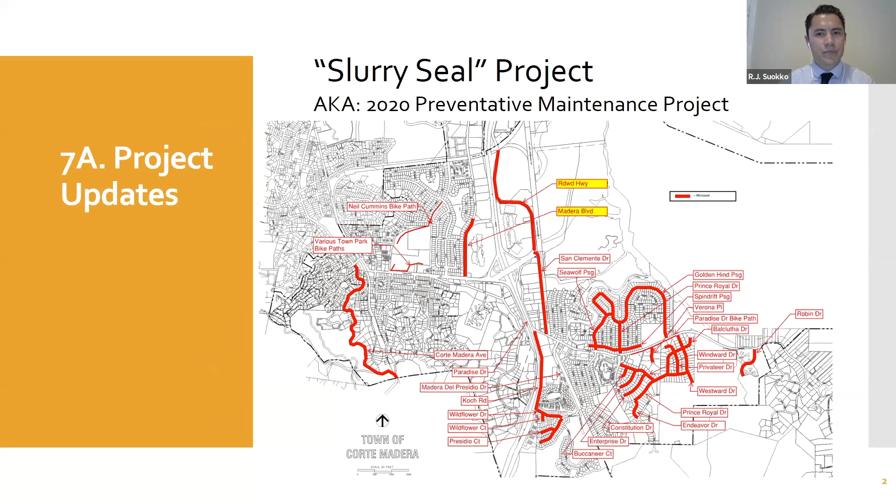All right. I'll jump into Madera Boulevard, which is what David Parisi will be assisting with here. So this was brought up at the last BPAC meeting as potential for improvements with regards to striping if we can loop it into our current Slurry Seal endeavor or micro project that's going off. And we think this is a great opportunity to include this street as a micro seal street in our micro Slurry Seal project that's about to hit and go.

And Parisi has been instrumental on a quick time frame to assist with identifying some real good enhancements for this little section here between what you're looking at in the upper left, the Madera Council Crest intersection, all the way to Tamalpais for that section along Madera. So I'll just touch on it real high level. We're looking at a class 2, buffered class 2.

Are people able to see, or do we want Jared to try to zoom in a little bit? How's the size of the screen and text? That's better. Okay, great. Thank you. Yeah, thank you, RJ. Better. Yeah, thank you.

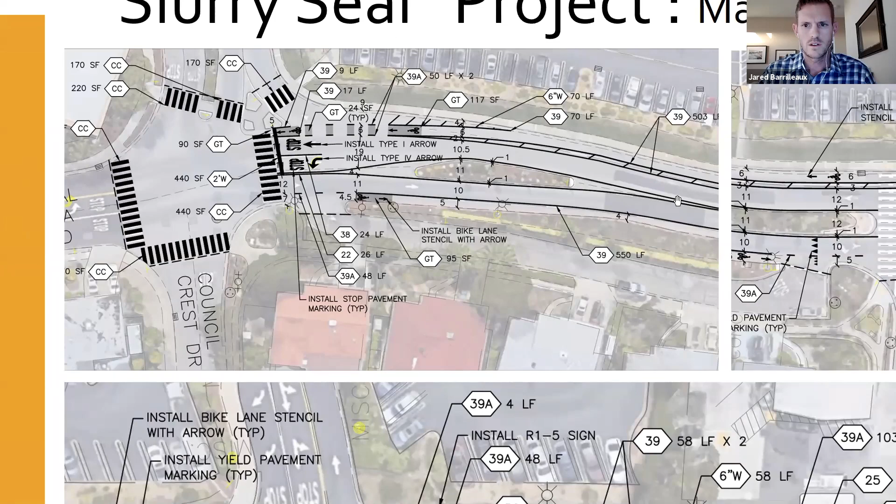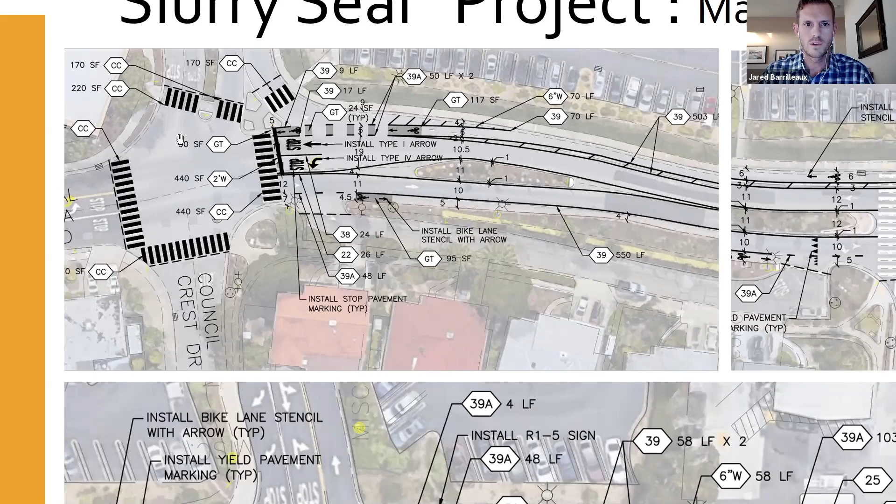You can see here in this zoomed in version, the buffered class 2 bike lane as it's approaching the Council Crest intersection, and then transitioning into Tamalpais, which you may recall was just recently done with class 2s. We see a lot of opportunity for improvement at this intersection, and then moving down and through all the way down to Tamalpais, there's been quite a bit of improvement for the cycling facilities that we're pretty excited about.

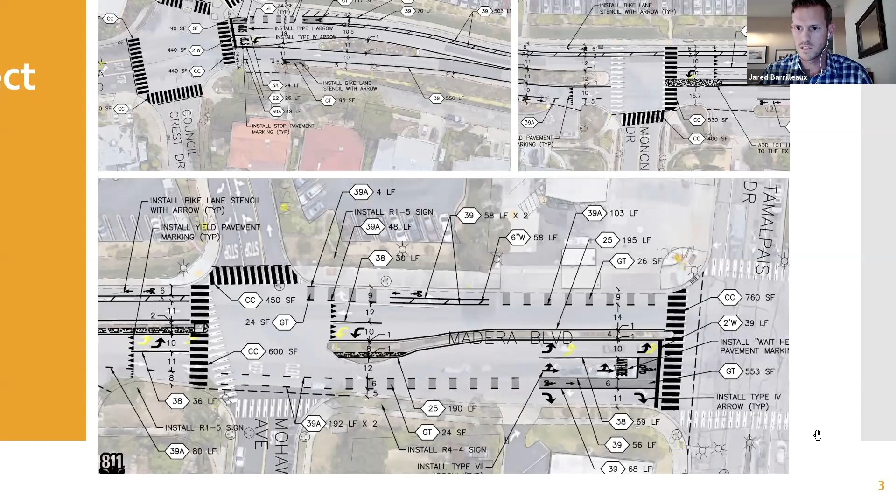That's why it has all these call outs, details and measurements for a contractor. Essentially what we did is we took some measurements of the street, and when the town asked me to look at this, I realized there's quite a bit of opportunities which I wasn't even aware of, but it was the town's idea to do a buffer bike lane. And lo and behold, in the northbound direction, that is totally possible. We are showing, for the most part, a 6-foot bike lane.

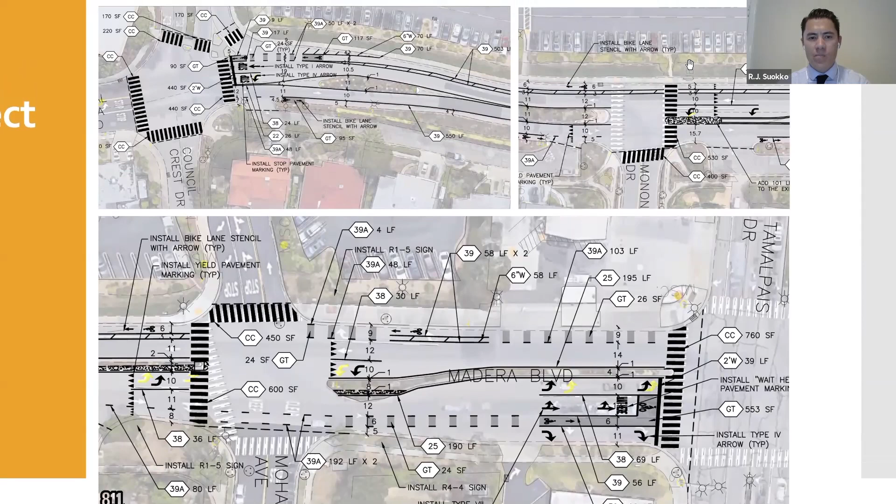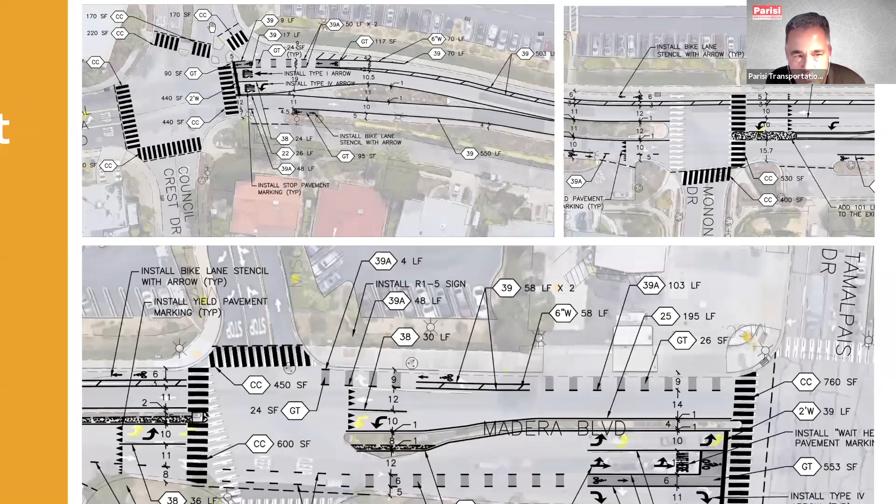It narrows down to 5 feet in one spot near the new pedestrian buffers or refuge islands, with a 3-foot buffer the entire way. So all the way from Tamalpais to Madera Council Crest, it'll be a continuous bikeway with some green blocks at some conflict areas by the 76 station and the right turn going into town center. Moving all the way north, at the intersection of Madera Boulevard and Council Crest, we found an opportunity to slow down that right turn a bit to the highway without affecting congestion. The intent is to not make it such a sweeping free right turn, but to provide some awareness between the cyclists and the motorists.

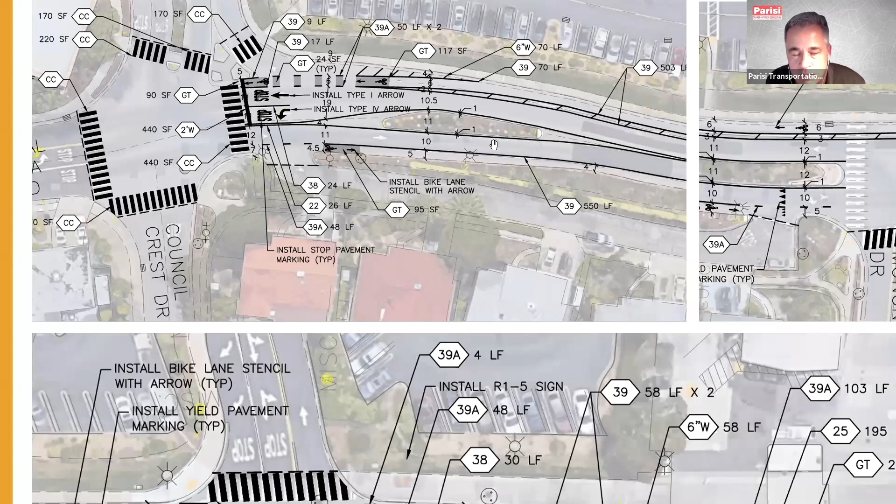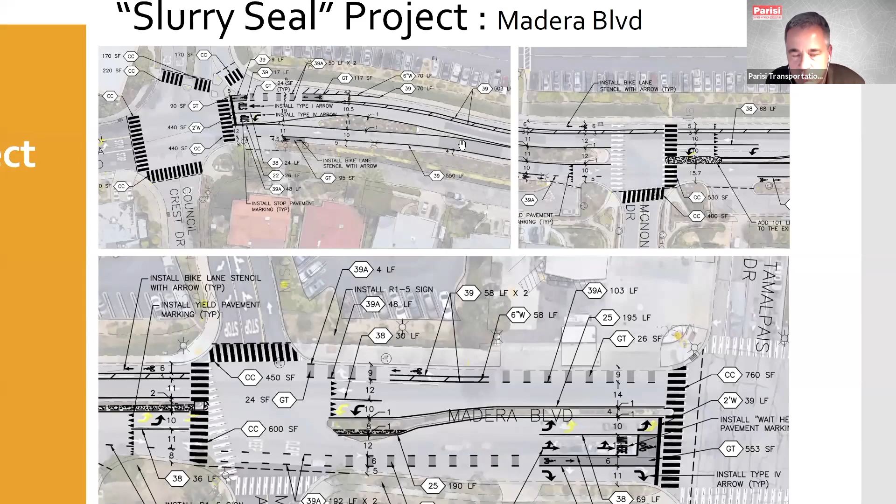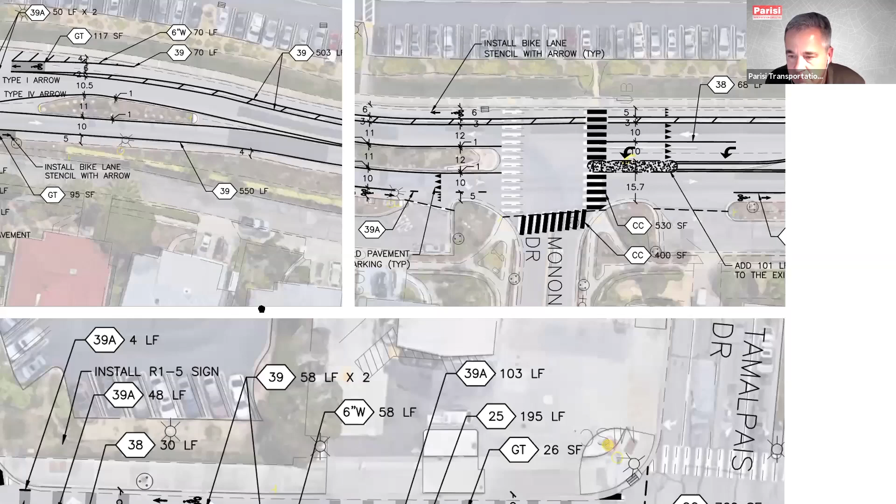Also, the traffic lanes are going to be reduced anywhere down to almost 10 feet in some areas along this street. In the southbound direction, we don't have as much right of way, and there's some tight points at a couple places. We do have enough room to get a 10-foot traffic lane in with a 5-foot bike lane, and there's also a 1-foot offset from the median island. I'm not concerned about that at all, because that's what we're seeing now on Tamalpais Drive - 5-foot bike lanes and a 10-foot traffic lane, and it seems to be working pretty well.

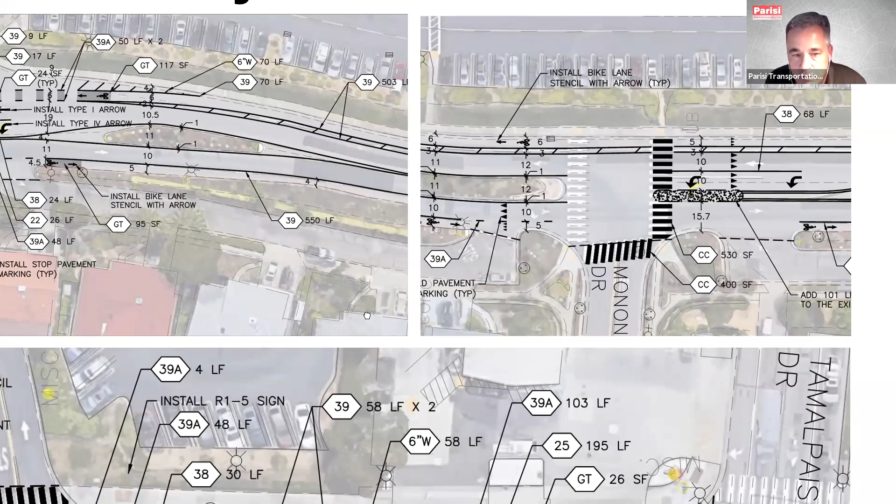And that could be continuous also all the way from Madera Boulevard down to Tamalpais Drive. On the bottom of this sheet, as Jared was pointing out, we also determined there's enough room to get what's called a bike box in at the intersection. Jared can put his hand on that real quick. There, we have 40 feet here, which is plenty of room to retain the traffic lanes that are out there today.

But also slide in a bike lane and then a bike box right at the end of the lane where cyclists, when it's a red light, can queue up so they can take a left turn without getting sideswiped or broadsided by a vehicle going straight, or they can go straight across. This is a neat opportunity to improve bike safety at this location without affecting traffic operations.

And there'll be some green blocks leading into what we call a streaming bike lane that goes into the bike box. Probably the most recent one of these we've seen implemented was on Camino Alto at East Blithedale. That's only 36 feet wide between curbs. Things are pretty tight there, but it works. We have 4 extra feet here between the curbs, so it's more than generous to provide this type of facility.

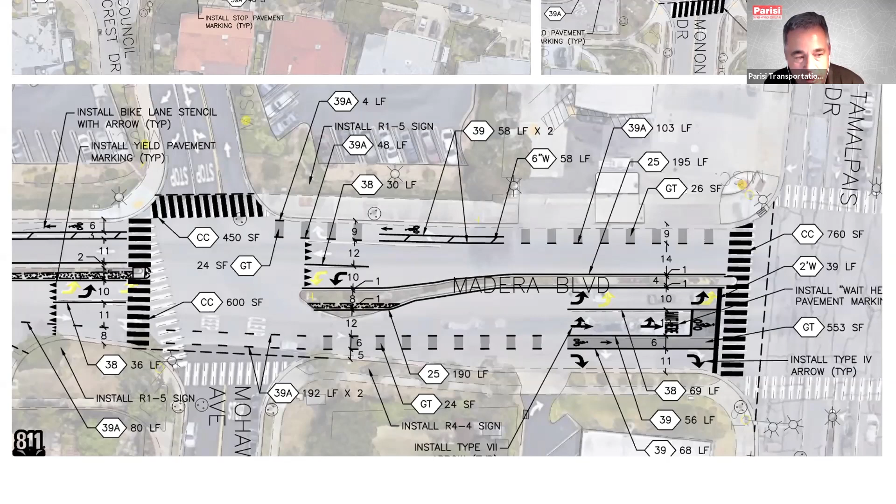So I'll stop there. There's other features on the street: continental crosswalks, stop bars, yield lines. We're right now looking at upgrading some of the signage as well. But at the end of the day, compared to just a few months ago, we could have continuous bikeways all the way from Tamalpais down to Pfeiffer, in both directions.

David, can you touch on just the right turn pocket that we thought would be better to have the dash green instead of that right turn pocket, based on, I assume, volumes? Right here? Oh, yeah. Yes, yeah, absolutely. Yeah, it's interesting.

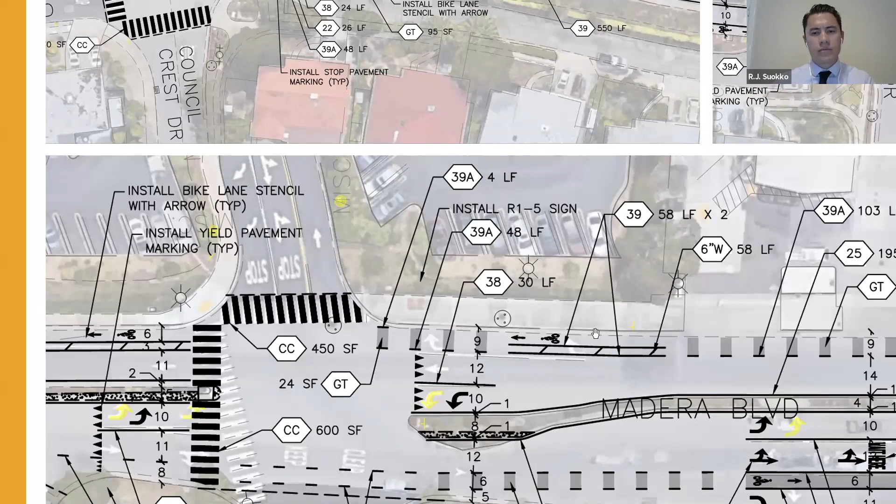We all get used to things, but this is actually a minor driveway for right turns into the shopping center compared to the next one down. It's interesting, this driveway has fewer right turns than the one to the north, but it has its own right turn lane. The one to the north has much heavier right turns.

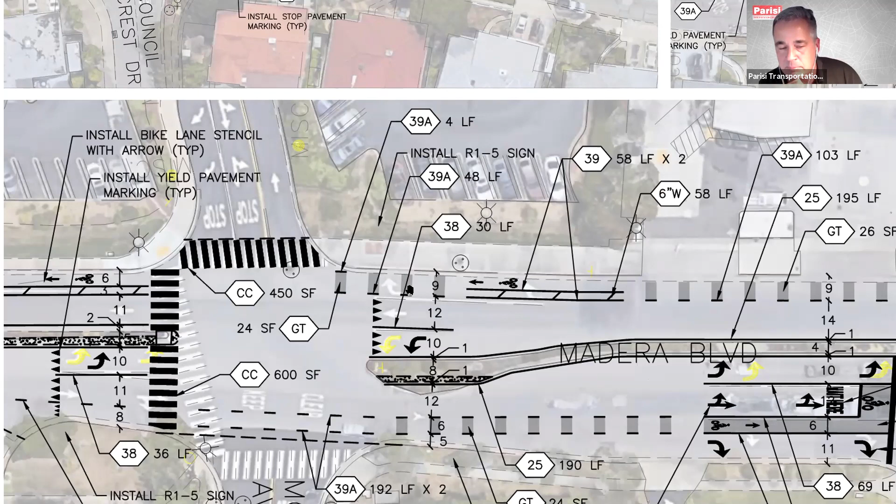It actually has two lanes going in but doesn't have a right turn lane. So just looking at traffic operations and how queues dissipate, we felt the best design would be to eliminate the exclusive right turn lane and provide green blocks. Right turns will go through the green blocks and make the turn into the shopping center. It's a safety function. We don't see any effects on traffic operations compared to current conditions. I think it'll be a safer condition because we don't want to eliminate that bike lane for a right turn lane also.

Is there more? Is that the end of the report? So that includes our presentation for Madera Boulevard.

Let's open up to questions first from BPAC.

David, can you explain the specifics? I think you mentioned trying to slow down the right turn from Madera northbound to eastbound. Can you explain the specifics of what is planned there?

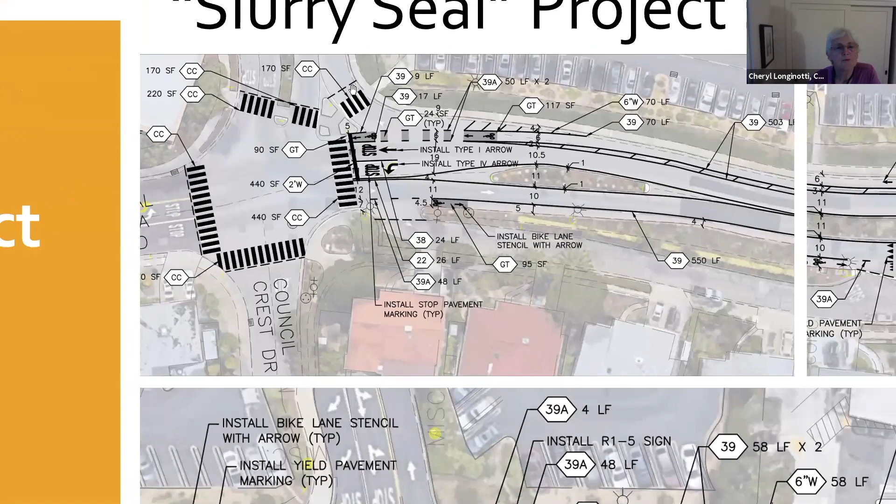Yeah, you can see, Cheryl, it's a pretty sweeping right turn, and you go into your own traffic lane. There are two eastbound lanes on Madera, on that 500-foot long segment. There's been a collision there in the past with a pedestrian. What our intent is, especially for promoting cycling through here, is to provide more awareness of slowing down that right turn, so there's a lot better sight distance between the motorist and the cyclist, they're not going super fast, and they're paying more attention.

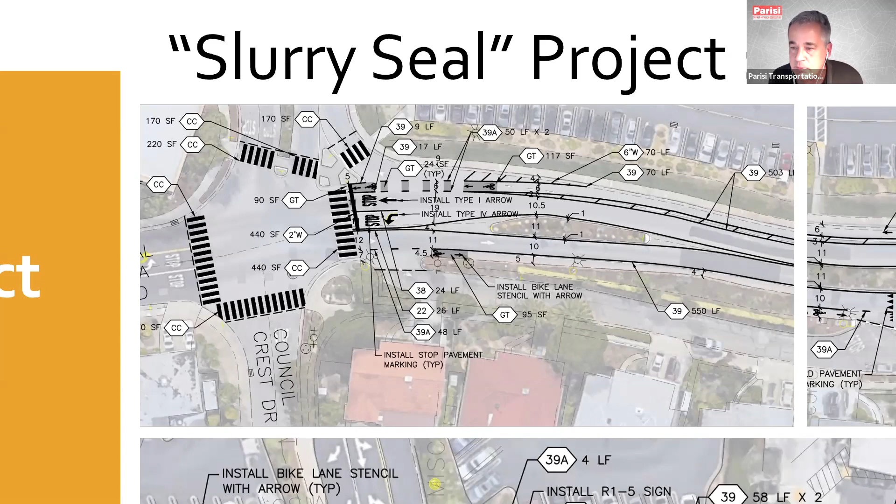By the way, at this location and southbound approaching Tamalpais, we're going to install some signs that say right turn yield to bikes, which will also have the green line on it, so drivers know it's a regulatory sign, something they need to do. By the way, that right turn is the only movement at this whole four-legged intersection that is not stop sign controlled.

Any more questions from BPAC members? And someone educate me as to whether or not micro seal, chip seal, and slurry seal are different, or are they all the same thing?

I think that's my area here. They're all different, and moving forward we're probably just going to keep it simple and call it slurry seal. A micro surface is a slightly more modified version of slurry seal. It has more additives, and therefore it's a little more viscous, a little bit thicker, but it's very similar. So it's kind of the deluxe version of a slurry seal.

A chip seal is different. If I could explain it in a simple way, it'd be like taking a slurry seal and putting Tic Tac size rocks on top of it after. That's more common in more rural areas, you'd see it a lot in West Marin and whatnot.

And then, sorry, what was the third treatment you were asking about? Was it just those? You hit all three, micro, chip. Okay, great. Not to complicate it further, sometimes they will take a chip seal and do a slurry on top of that so you don't have that abrasive surface, and they call that a cape seal.

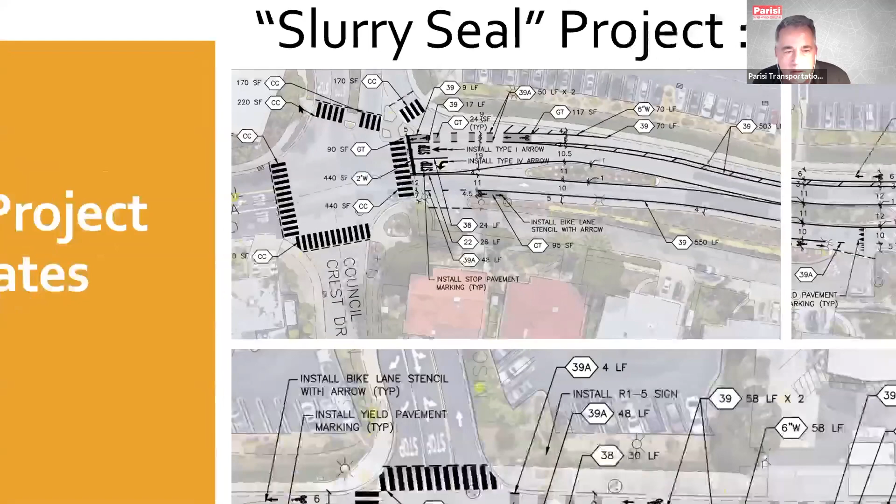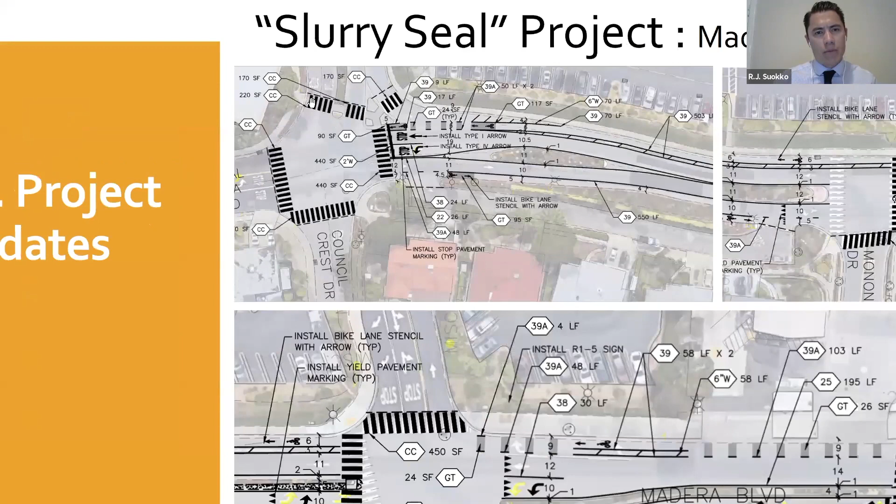You can see those dashes—that's where the street will be repaved, marking the limits. It's really dictated by the location of that curb ramp. You can't put a stop bar on the wrong side of a curb ramp landing; otherwise you're creating a conflict zone.

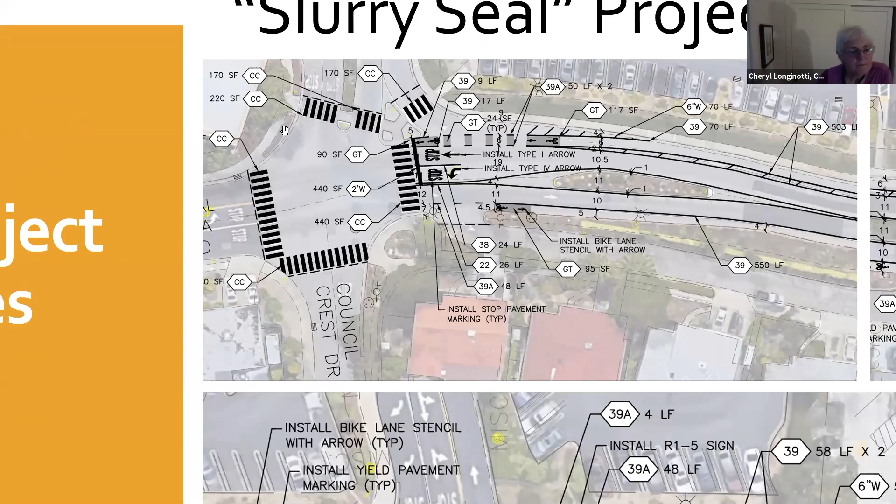Any further questions from BPAC members? Okay, then we'll open it up to the public. Is there any member of the public who wishes to comment on this particular topic—the slurry seal project?

Looks like Cindy Winter. I have just one quick comment. Thank you, Bob. I want to compliment you all on the Tamil Vista Drive improvements—that's a huge improvement, and it's a lot more pleasant to ride along that road now. So thank you again, that's all.

Thank you. Any other public comment on this topic? Okay, then I'll bring it back to the BPAC for any further discussion, comments, or questions.

The only comment I have is I just find it remarkable how nimble, if that's the right word, Public Works, and of course Parisi Associates, have been in responding. This is going to make a big difference, and I'm just happy that people have the insight and ability to work that quickly.

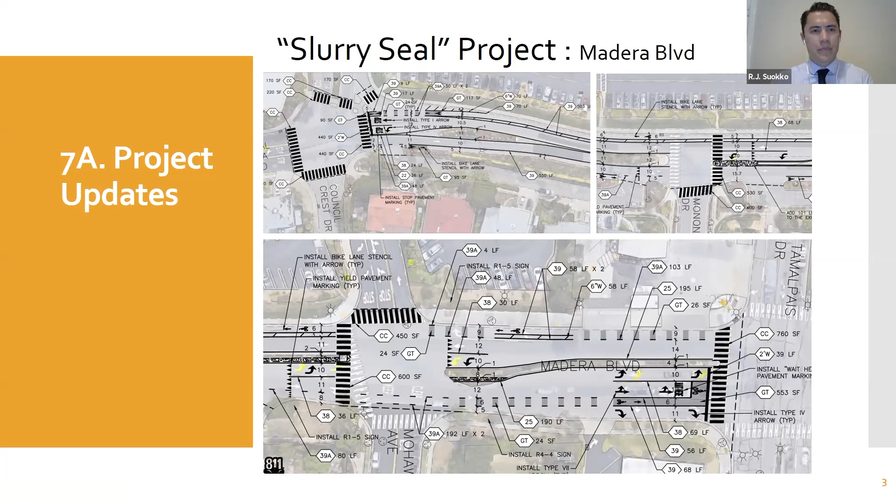Okay, then I guess we can close this item. We have one more—Corte Madera for David to discuss. So at the last BPAC there was discussion about taking a close look at Corte Madera Avenue, and that perhaps when it was last paved there was a missed opportunity. That's my home—sorry to interrupt—but that's my home, I just looked down and realized I'm looking at my roof.

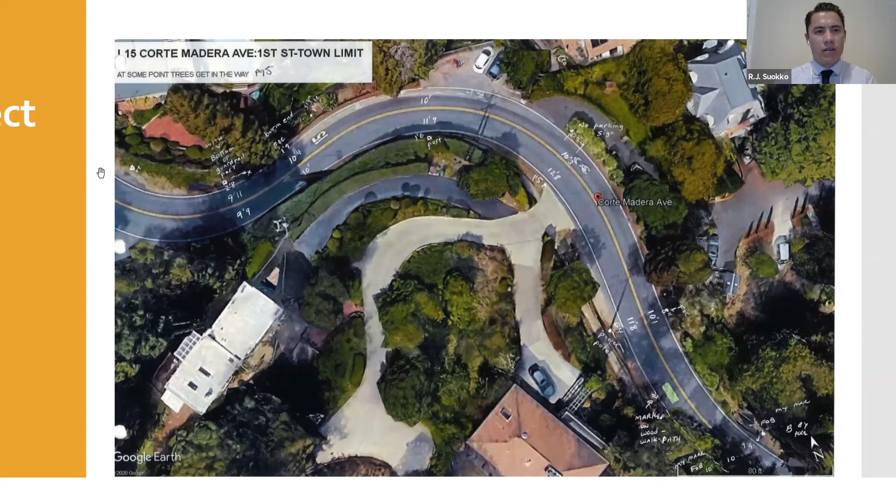So as part of our slurry job, we had our contractor do what we call a striping inventory—a detailed measurement of lane widths, shoulders, and all those things. We've taken a close look, and David has really spearheaded this for us. It varies quite a bit—it wasn't a standard 12 or 13 foot lane in the southbound direction, but really varies anywhere from just under 10 feet to, I believe, 14 feet in some spots. The long and short of it is there are opportunities; it's just going to be a little more of a customized improvement.

And I think David can speak to that best. So go ahead, David. Sure, yeah.

A couple of years ago, I worked on the Camino Alto part in Mill Valley from Blythedale up to the top of the hill. That was quote unquote customized as well, as RJ mentions. We were out in the field taking lots of measurements, we barely squeaked in for most of the way an uphill bike lane. That road is wider than Corte Madera Avenue. But RJ's asked me to take a look at this too.

And we have more work to do. Generally what we are seeing though is that edge line for northbound traffic on the right side, the white line, that's pretty much going to have to stay where it's at. It's pretty smooth, there isn't any wiggle room outside of it. So for the most part, we're going to be retaining that line.

What we're doing next, it's kind of a logic exercise, is taking a look at that northbound traffic lane and seeing how wide it is. Is it possibly too wide in some areas, particularly in some of the tangents, which are the straight sections. And then in any of the corners, is there any room to move the center line to the east? We'll see if there is.

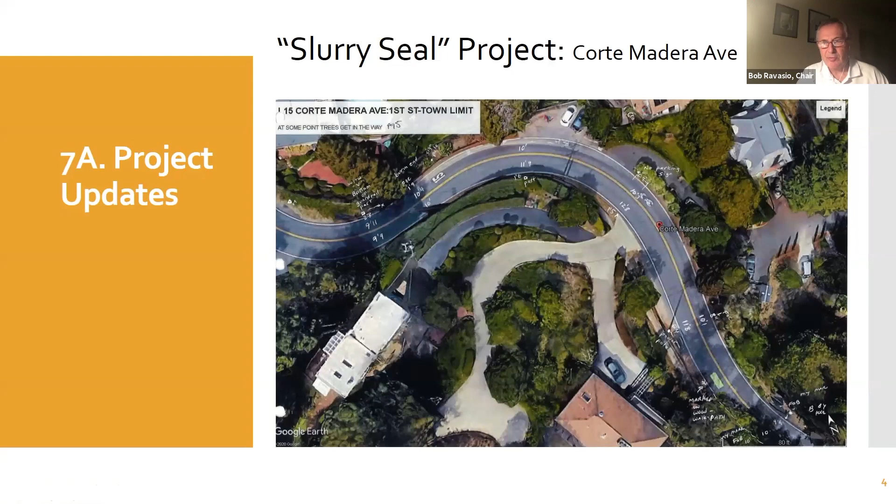Okay, thank you. Any other questions from BPAC members? Okay, then we will open it up to the public, and it looks like we have Cindy Winter.

Forgot to lower my hand for my last comment. I have a specific comment here. It looks complicated, and I'm hoping that everything works out as it should. That's all.

Okay, thank you. Looks like we have Janet Furman. Janet, if you'd like to speak. Yes, hi.

I commend you all for wanting to make Corte Madera Avenue wider and safer for cyclists. But I also like everyone to keep in mind that the cyclists who really know their way around Marin County don't necessarily ride on Corte Madera Avenue because it's so dangerous. They ride on Chapman - it's a lot quieter and a lot safer. The people who ride on Corte Madera Avenue are the ones who don't know that Chapman is a better alternative. So what I think makes a lot of sense would be to encourage cyclists to use Chapman instead, which happens to be my own street. I'm happy to share it with cyclists. It's wide, it's got smooth pavement. Make it a sharrow - put the share symbol on it, make some signage that designates Chapman as the main southbound uphill route to get from Corte Madera to Mill Valley. Let's do what we can with Corte Madera Avenue, but let's take advantage of Chapman being a better alternative for most cyclists. Thank you.

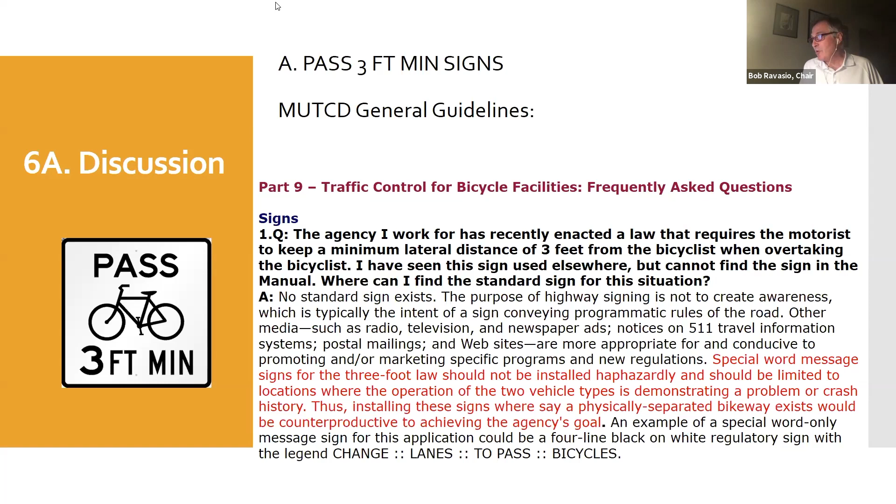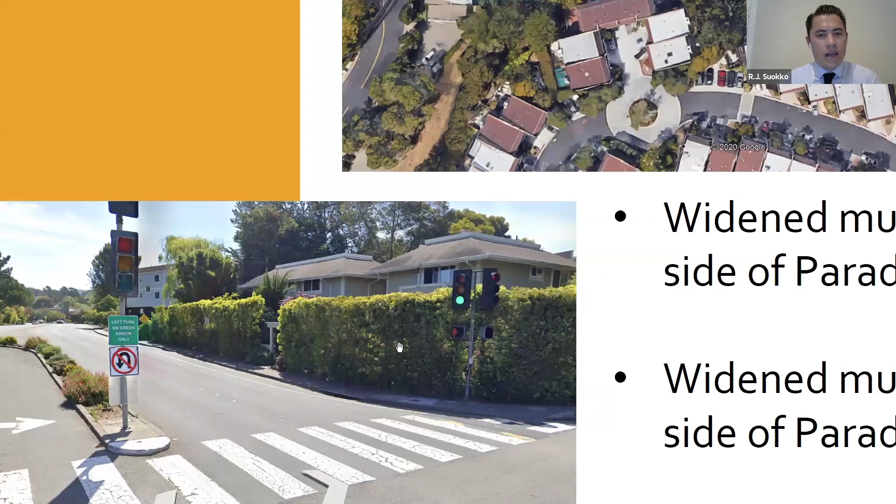And yeah, so the main question would be, transition to something like buffered Class 2s when you have a widened sidewalk to the west and a Class 1 facility on the south side to the east, or you can extend more of those widened facilities on one side or the other. At a very preliminary look, I could see some merit to putting that widened sidewalk or multi-use path on the south side, and partly because of that photo you can see at the bottom left. That's on the corner of El Camino Drive and Paradise. That's a heavily used bus stop for children. And right now you can see some large hedges.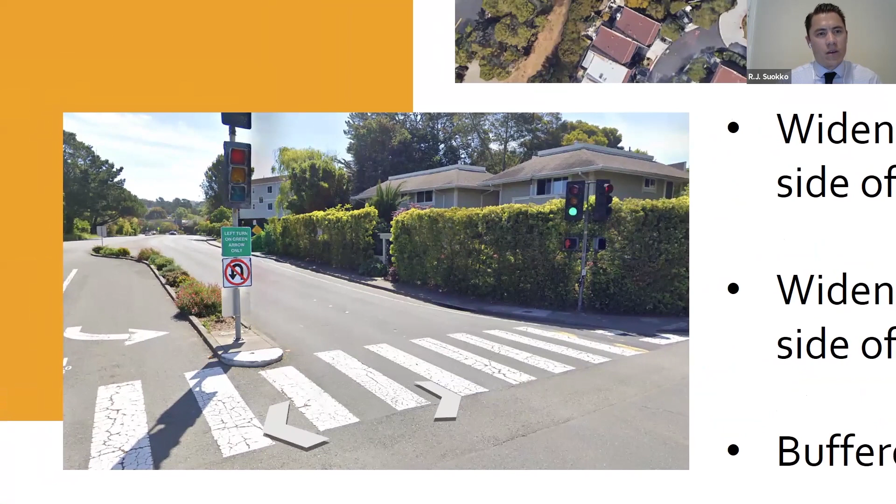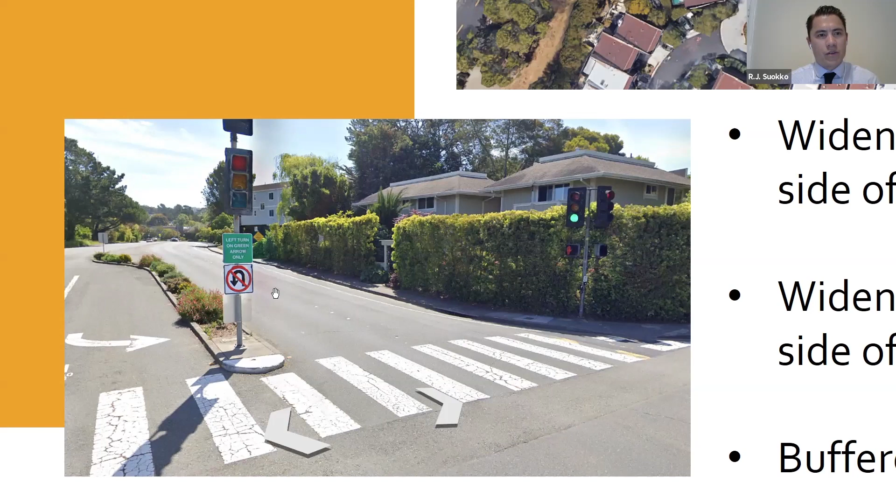And so by widening that, I see more of an increased volume for kids to wait, improve sight distance, and then it would then also connect well with the Class 1 facility that starts at Prince Royal. So again, very preliminary, but those are just some initial thoughts. And so I want to get your suggestions at this early stage, and then also your concurrence that we should fold this into our work plan in the near future.

And then, yeah, thank you, RJ. The last bit that I will touch on for Paradise Drive corridor here is around the horn at Ring Mountain. So coming from the end of Westward, swinging around and all the way through the school zone to the end of beyond Robin Drive to town limits, pretty much. You can see we're looking at Class 2s each way.

Ped crossing improvements, I'll try to zoom in right here at Marin Montessori. Currently, we don't have rapid flashing beacons, so we're looking at putting those in as part of this. And Marin Montessori would be assisting with cost share for work directly in front of them. We have a private development happening over here off of Robin Drive that will be helping with the improvements right here at Robin Drive and Paradise Drive.

And then, a little hard to see, but the ped or multi-use path on the south side would run the whole corridor up to Ring Mountain. And yeah, so that touches on some of the multimodal improvements along here. And I'll let RJ touch on the CAP and the sea level rise portion of it.

Sure. So this project has been around for some time and has evolved over the years by the addition of the development and the school improvements, and then also as we've developed our climate adaptation plan, it really asked the question: if we're going to originally build a new roadway that has a 20+ year service life, which is great, and then once you factor in sea level rise, if we don't get the full service within that investment, then should we be factoring that in?

And so at a staff level, we thought that was the right thing to do, and that's been echoed in our climate adaptation plan. And so we believe the design funds from TAM are still eligible to include that sea level rise component. And we just want to get your feedback on including that here. We still think we can get all of the same multimodal benefits that we would otherwise, even if we do raise the road. And we're at a time where we actually haven't done significant design work.

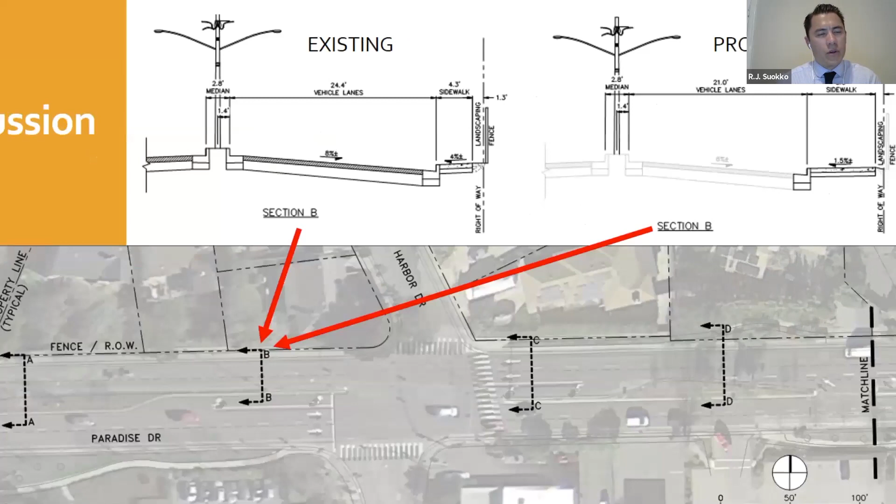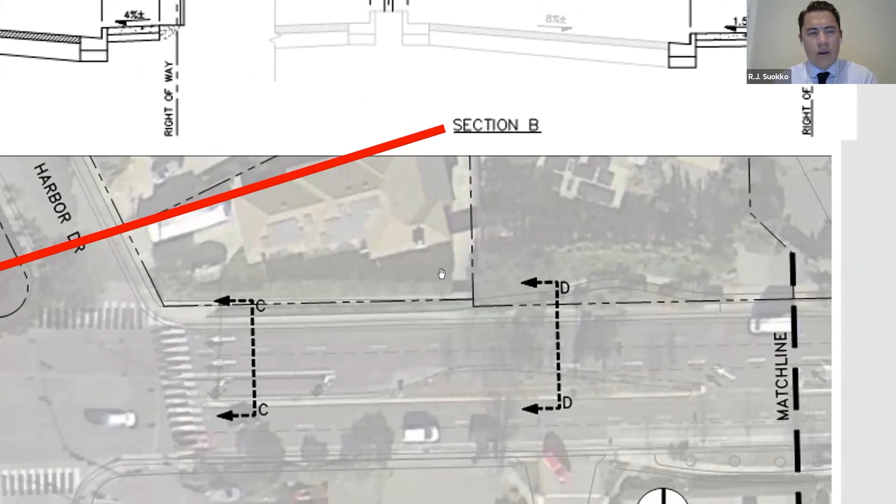Currently, this is about mid-span. We currently have a 4-foot sidewalk that meanders away from the curb and gutter. And so if we kept that existing alignment and went to 8, we wouldn't technically have right of way. But we do have some options that would work within our right of way, and we're going to present those and see if they're amenable to those. But other than that, I'm not aware of other conflicts based on these high-level alternatives we presented.

My other question is whether you guys are aware of the path that goes to Tam Valley that was constructed above ground. It's kind of a boardwalk that goes from the Mill Valley Bike Path and takes cyclists and pedestrians into Tam Valley. And it's built 2 or 3 feet off the ground to accommodate that area that floods there.

Are we talking the Tennessee Valley path? Yeah, that's how I should have identified it, right? The Tennessee Valley, yeah, no problem. Yeah, I was involved in that project. Yeah, boardwalk type treatment. Okay, I'll make a comment about that when Bob opens it up for comments.

I had a question. Can you put the San Clemente to Seawolf slide? Yes, thank you. So you're going to widen the sidewalk. This is where we've had so many comments and issues with bikes, because there's kids using that for biking in the morning to get to school. So you said you're going to widen the sidewalk to 8 feet. Is that going to become a multi-use pathway, or are you going to keep bikes on the street, or have you not figured that part out yet?

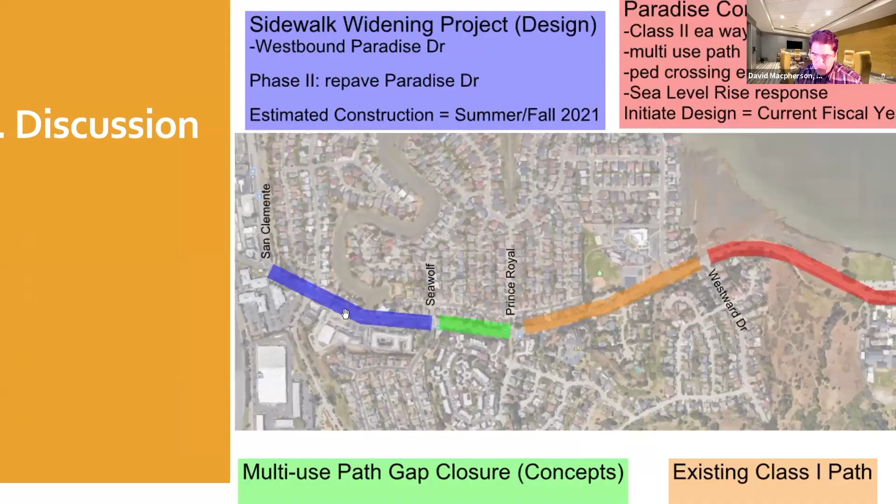I'm not sure if you're talking about the curb face meandering, or the path itself. There's a section where the sidewalk actually pulls off of the curb and gutter, and there's somewhat of a snake. Is that the area you're talking about? Right there? Just where your hand is pointing there?

Yeah, so that's the area where we have the right-of-way challenge we're still working through. The current alternative that would allow multi-directional facilities within our existing right-of-way would be a split path, sending cyclists moving toward the malls on the current meander, and cyclists going the other way on the inside closer to the road. That's one we believe we could build within our right-of-way, should the property owner not be interested in the separate idea, which would be the more conventional approach of just going to an 8-foot sidewalk closer to the roadway.

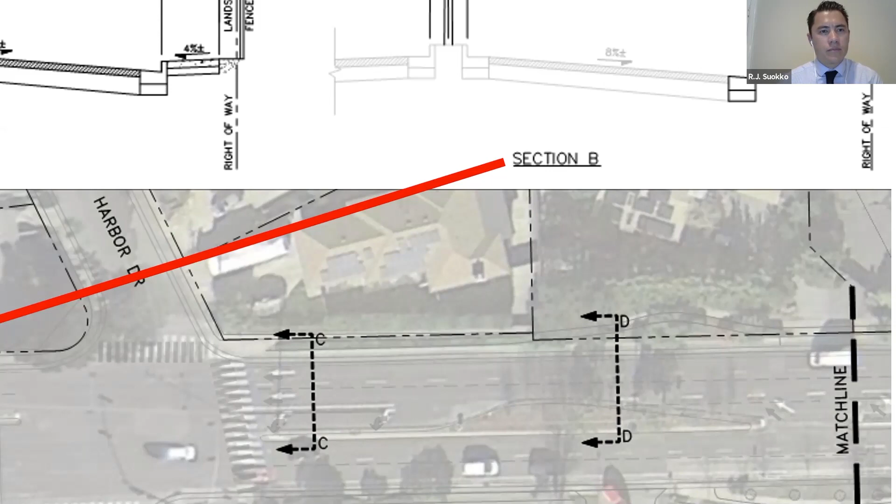Okay. Any further questions from BPAC? Okay, then we will open it up to the public.

Looks like Cindy Winter has her hand up.

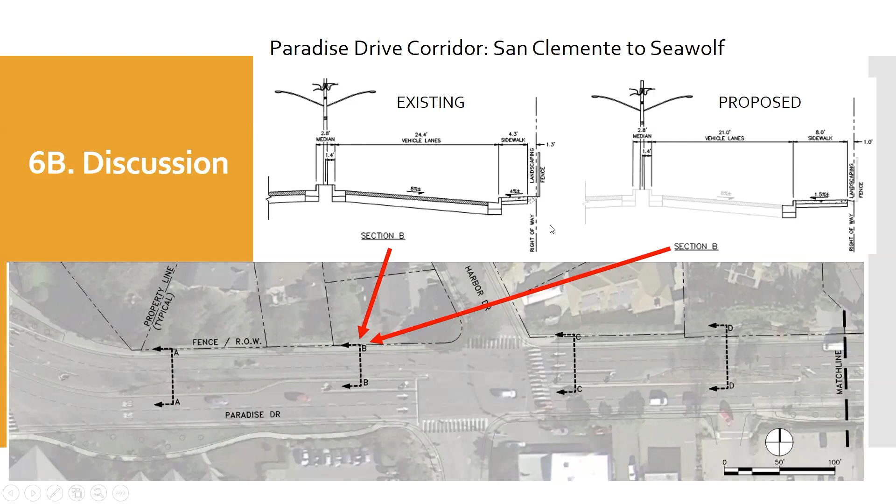Thank you. I've always been fascinated by the Westward intersection, and I didn't see that specifically on any of these diagrams, or maybe I didn't recognize what I was looking at. What I saw was a blank space between two of the segments, and I wondered whether any consideration is being given to Westward when this planning is going on.

Okay, because my concern is that's a very wide intersection. It's unusually wide, and cars come down the hill, and if they're turning right, they're going at a pretty good clip. And when cars are approaching and turning right from the other direction, they're pumping the gas to get up the hill, so they're going pretty fast.

And it has always been my concept that there would be several little pedestrian refuge islands there that would narrow the channels of vehicular traffic and give pedestrians a perch in a pinch, so to speak, so they could cross that intersection more safely. I know those drawings I made to the best of my ability are floating around somewhere, and it may be premature to send another copy, but I was just wondering if you were even thinking about Westward.

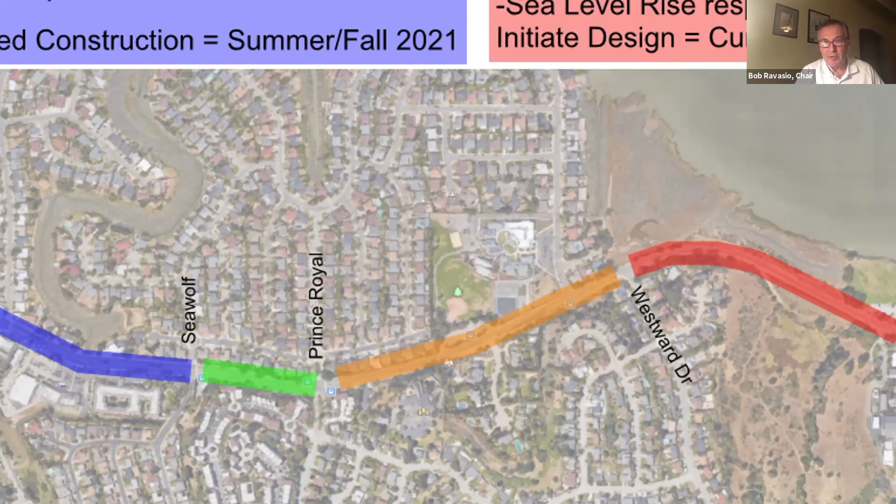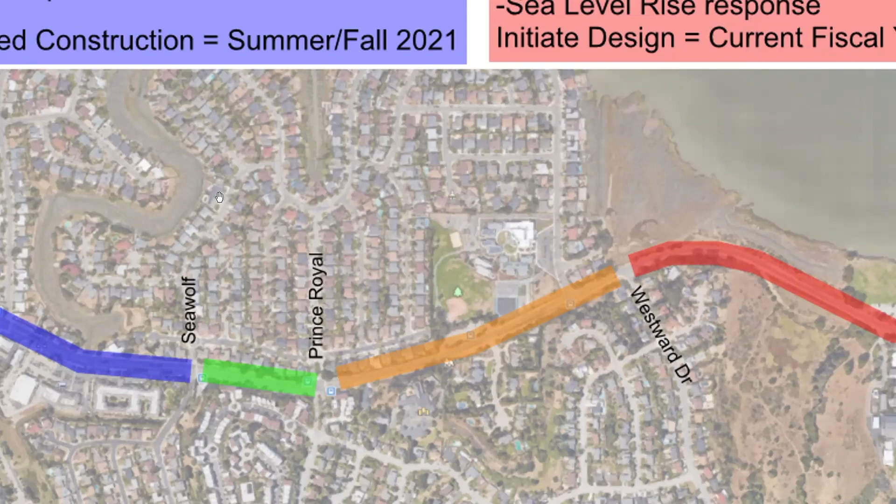Yes, hello again. I'm curious if this stretch, or the stretch west of Prince Royal, has ever been considered for a road diet. My understanding is you can accommodate up to about 20,000 vehicles a day with one lane in each direction and a center turn lane. Especially since this conversation is really focusing on the challenges presented by having limited right of way, I'm wondering if there's opportunity there by eliminating a travel lane in each direction on this stretch.

I'll also say, I don't believe she's on the call, but I know if Maureen Gaffney were here representing the Bay Trail, she would probably remind you all that their vision is for a continuous multi-use pathway of a width that can accommodate both people on bike and foot, and I think she would express that for this project. Thank you. Thank you, Bjorn.

Okay, looks like David Bell.

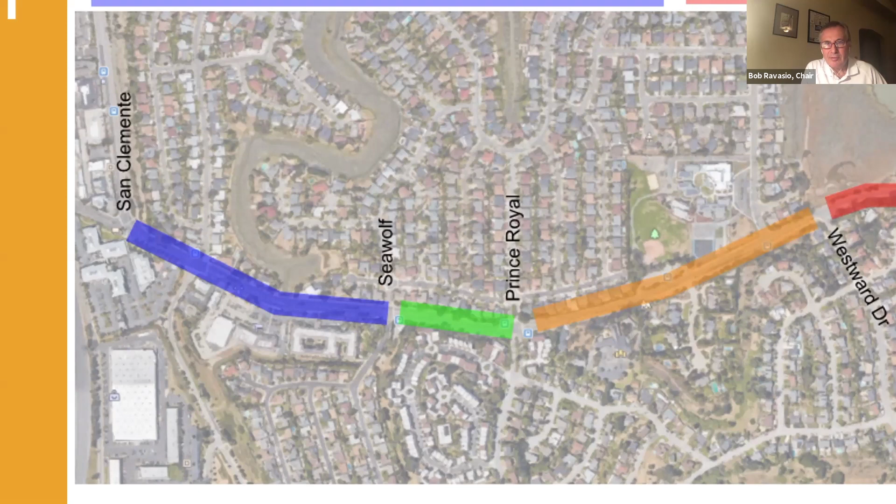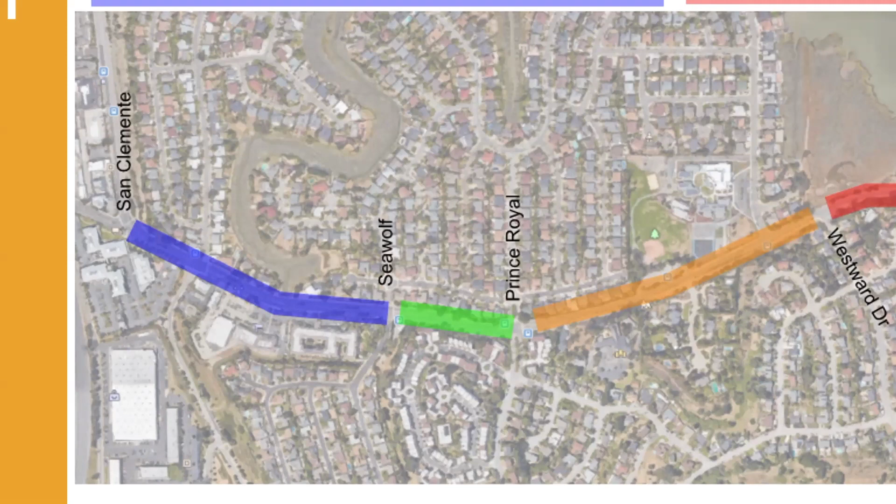Yep, thank you. I just want to point out that this relates directly to my email at the start of this meeting, that intersection is what kids are avoiding. Even if this improvement proceeds, I hope it doesn't dissuade your committee from looking at that pathway I recommended, because kids will always be using this shortcut. An improvement to that shortcut can be accomplished, I believe, in much shorter order than what this project will achieve, and even the construction project will cause delays. So I'm imploring the committee to look at that short 150-yard pathway from Echo to San Clemente.

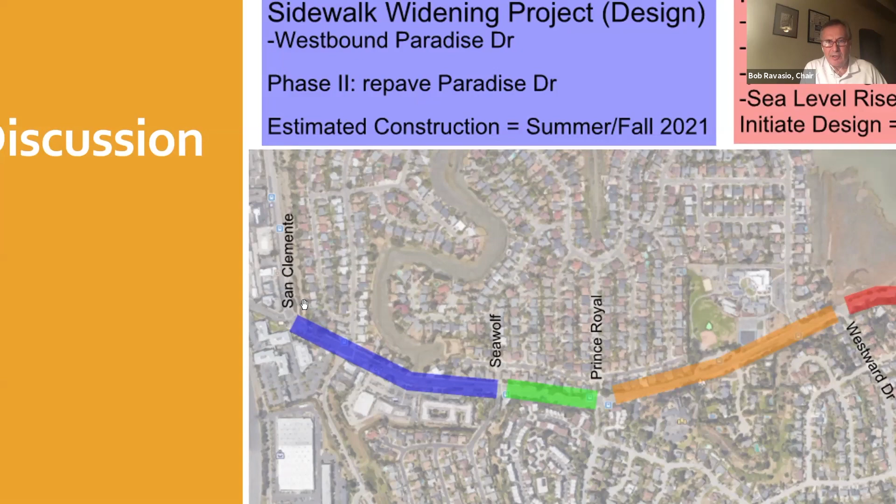This is great that you're thinking about looking at all of the segments at once, I definitely salute you on that. And it's great that you've got movement on the San Clemente to Seawolf part, that's something Safe Routes has been asking for and it's high priority for them. I have thought about the red part, westward to Robin, and wish that that really be a wide multi-use path on the south side, because we have climate change and a need for more kids to go safely to school. I know some of my neighbors are both teachers and students at those schools, the Montessori and Marin Country Day, I guess. So it's adults riding bikes with children, and there'll be people walking. I'd like to see at least the 8-foot multi-use paths. I'm wondering who the class 2 bike lanes would be serving there, because if you have just a shoulder, the bikers are pretty much people riding on a narrow 2-lane road with shoulders all the way around Paradise. So I don't think this gives us any more users. I'd like to see this multi-use path be wide enough for both walking and biking, both directions, all the way out to the schools on the south side.

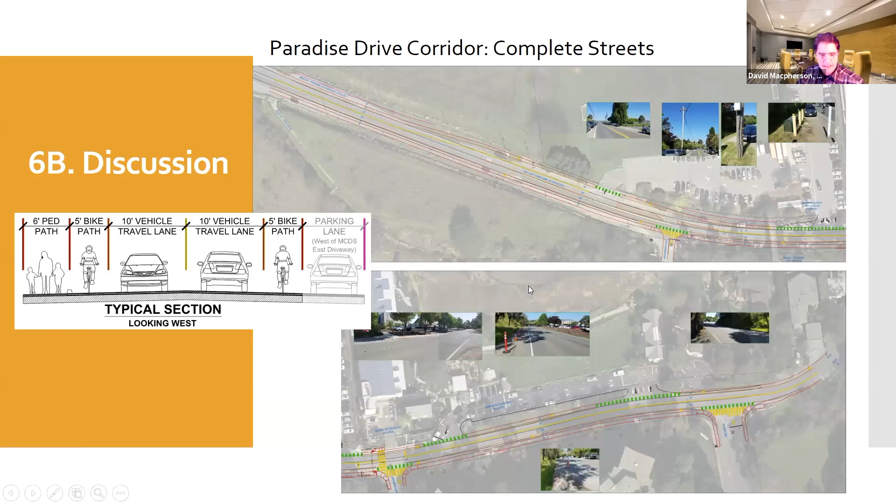That section of Paradise has a bit of a problem in that there's a pretty good sized drainage canal in front of Ring Mountain. Over the years, I've thought that might be a section that could take advantage of the boardwalk RJ was involved with in Mill Valley that went to Tennessee Valley. So if it can be widened enough and sea rise can be accommodated, and if there's enough right of way to do it on the surface of the road, that's great too, and probably less expensive. I just wanted to toss that out as a possible solution for that unusual section in front of Ring Mountain. Thank you, David.

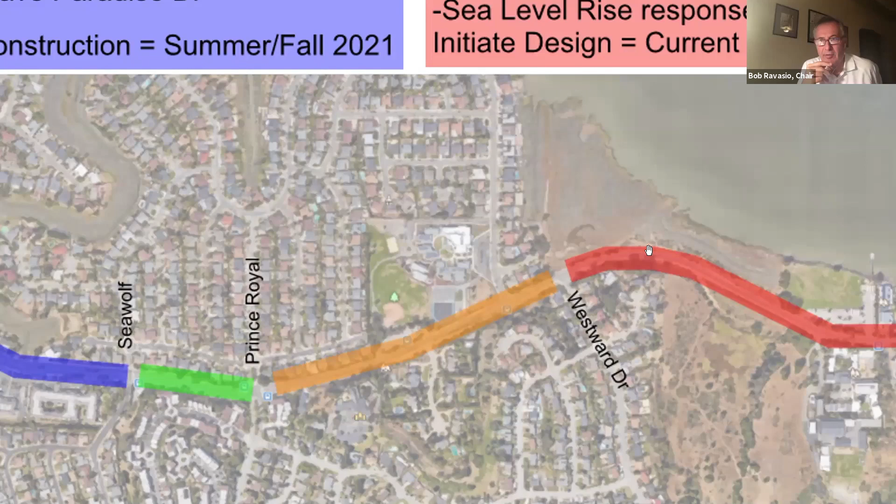And I kind of jumped ahead there. I meant to go back to RJ and Jared. Did you have any responses or anything you wanted to say after public comment before I come back to the BPAC members? Yeah, I heard two questions and some other comments.

Regarding the westward intersection, I've given that some thought. The curves there have been fanned out pretty wide, and I think there's a lot of opportunity to shorten that crossing width. Also, if you're coming down the hill from westward, the stop sign is so far back from Paradise Drive that there's an opportunity to pull it forward to improve sight distance. The gaps in the image we're showing here by no means will actually be gaps — that was just for showing the various segments — but there's definitely some opportunities to improve that intersection. Separately, I don't have a specific answer on the road diet, but we can take a look at the volumes and see if there's any merit to that.

Thank you, RJ. Okay, so then back to the BPAC. Are there any other BPAC members with comments on these particular items, Bob? I'd like to just mention a couple of things.

Please go right ahead. So just FYI, school is back in session at the Cove and at Neil Cummins, and traffic patterns are probably a little bit different because both schools are doing AM and PM sessions to cut down class sizes. I'd also like to mention that any opportunity for curb ramps at the crosswalks would be very helpful for the little kids on bikes, because a lot of times the bikes are oversized or mis-sized and kids are negotiating bikes as it is. So anyway, just thought I'd mention that.

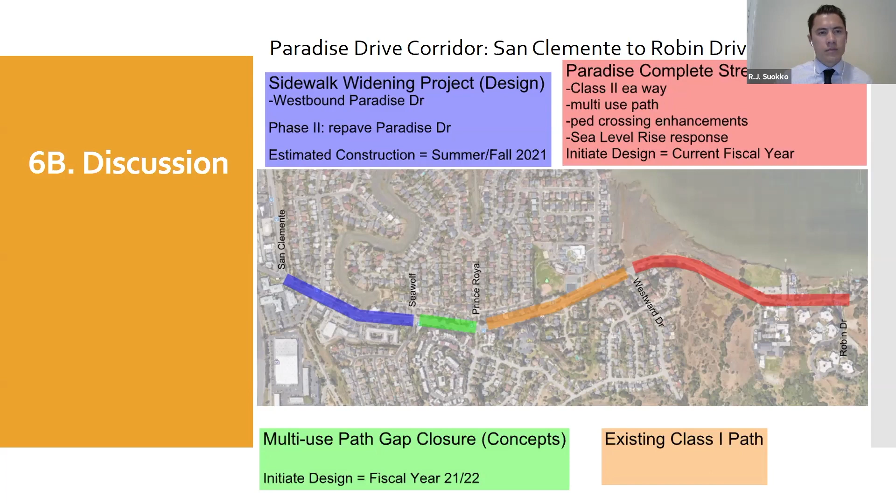Next item on the agenda, Lucky Drive bike enhancements. RJ and Jared, back to you guys. All right, thank you, Bob.

So here we go. This will be nice and quick and a real easy one. We're just diving into this. It's Lucky Drive between Doherty and Fifer, and really we're looking at two kind of conceptual options here.

What you see on your screen now is buffered class 2s in each direction. This is a heavily traveled corridor here for cyclists, peds, users going to and from the school. So there's quite a bit of use through here. And there's two kind of areas of consideration and concern for both of these options we're presenting.

It's each end of this, right at Doherty Drive, right in front of Redwood High School. There's a lot going on. You have users in the westbound, peds, cyclists, motorists coming to this intersection, the free right up here on Doherty Drive. Cyclists may want to be accessing the High Canal path. It's a pretty heavily used path through here, getting across the road to a multi-use path here on Doherty. So a lot going on, and that's definitely something we want to be cognizant of when considering design options here.

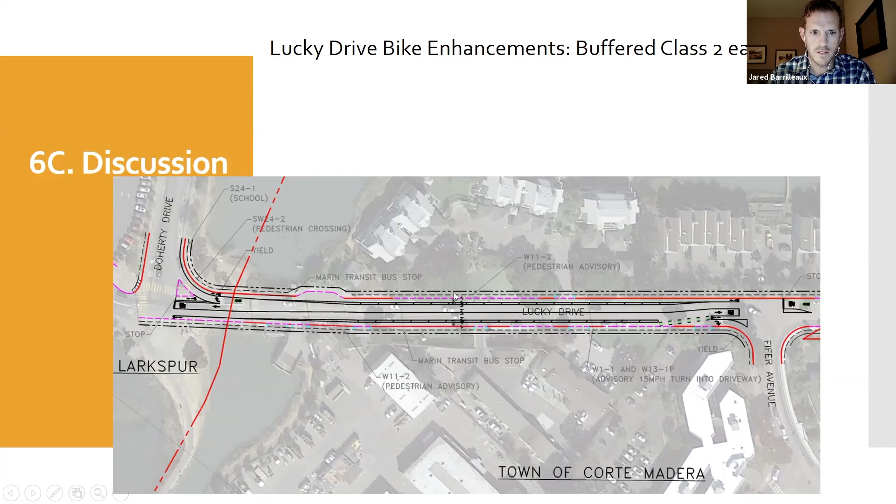So now looking at the other option that we've looked at so far, and this is a conceptual plan. We don't have this currently. We're still in kind of the scoping effort, and this came about as part of the Safe Routes Committee discussions. There was a little bit of funding thrown at it to look at what's possible, and what came back were class 2, buffered class 2s, and a class 4 option. So very preliminary, but that's kind of what we have to present today.

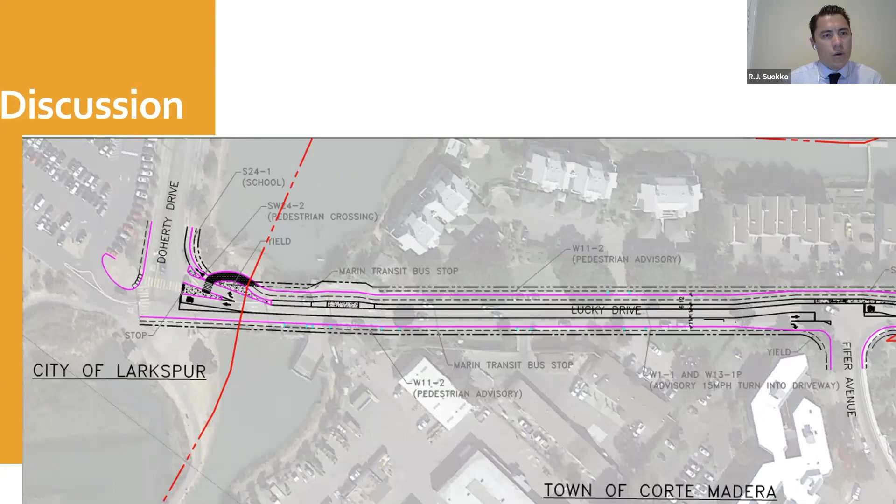And then once we go through that, there's also a separate discussion about some sea level rise challenges here that I can touch on. Yeah, so the class 4 here is a little bit of a kind of curl-around to get access to this location to get across the road. It would just be a class 2 continuation of Doherty Drive in the sidewalk here.

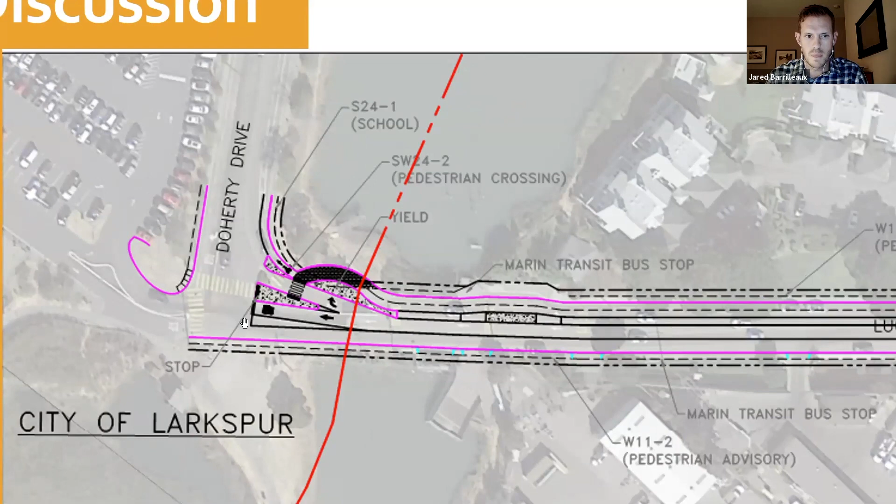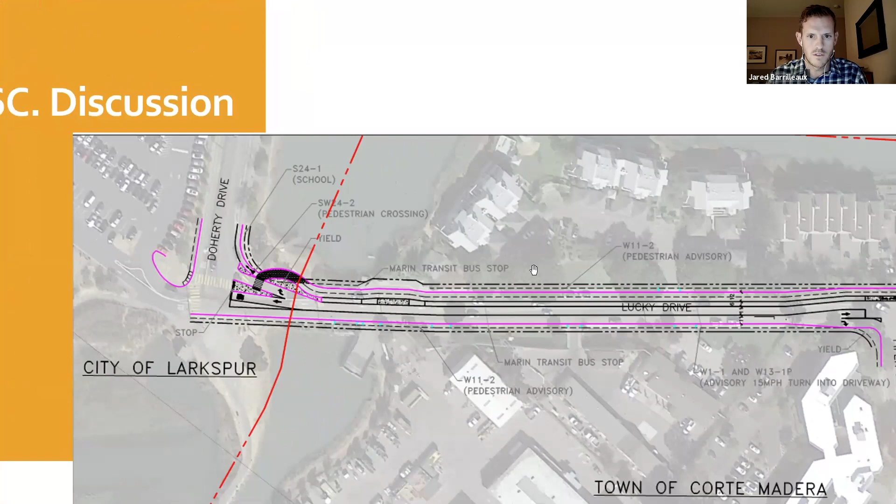So the class 4, as you know, is a bicycle facility in each direction. So those that are going to be on bicycles going eastbound would be on the northern side of Lucky Drive, which does pose its challenges to how do we access that safely for the users coming onto that. This intersection would require a design, pretty detailed analysis to get that accomplished.

And then on the other side, the same discussion: how's that cyclist then get ejected off of the class 4 facility onto the Lucky Drive continuation into Marin County? So that would need to be studied as part of this. It does remove the cyclist from this right-hand movement discussion. So if that cyclist does want to continue to Fifer, they're kind of going around the corner and coming back. So there's a lot to be really reviewed here, but something that we're going to be keeping BPAC apprised of as we start the discussion of options here. And we will be seeking feedback on the preferred use and facilities to get implemented here.

And then RJ, I think, was going to mention some considerations as he did with Paradise Drive regarding sea level rise. Yeah, so Paradise Drive, the section between Robin and Westward, as well as this portion of Lucky Drive, have been identified in our climate adaptation plan as near-term strategies. This last December, there was about 2 feet of standing water here in front of our town courtyard, kind of mid-span on Lucky Drive. As we all know, this is a heavily used route to many parts of Central Marin, and it serves not just Corte Madera, but the region.

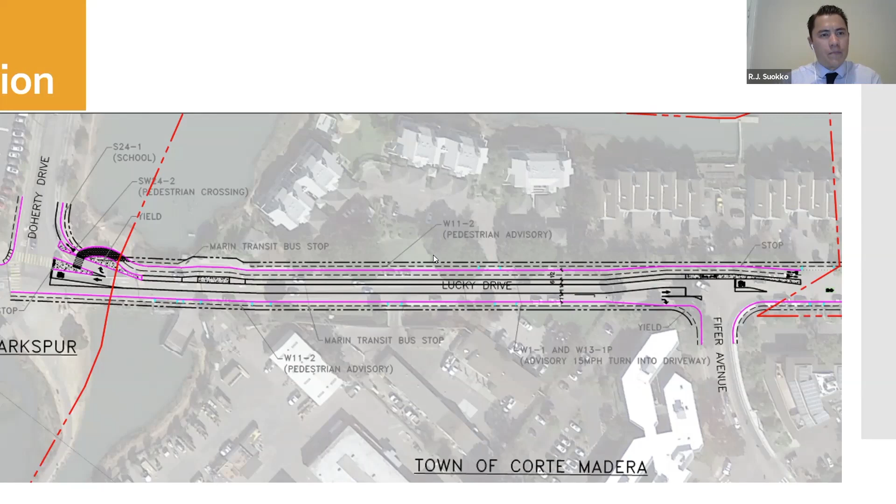This is a preliminary application, and they have since come back and said this at least qualifies for the program. Please submit a full package. So we'll be preparing a full package for grant funds due sometime around mid-December. If we get lucky and get those funds, this could become a real life project that moves forward quickly. In the meantime, we think scoping it and having the discussions will allow us to move quickly should we get those grant funds and opportunities.

Okay, and that's all we have. Thank you. So first off, any questions from BPAC members on this? Okay, I don't see any questions.

Then let me check the public. I don't see any hands raised for the public right now either. Oh wait, here we go. Yeah, Bjorn, looks like Bjorn.

Hey again, I just wanted to say this looks great. I'm glad you're considering both the buffered bike lanes and the two-way class 4. I just wanted to mention that if there are serious operational challenges with having the two-way class 4 on the north side of the street, especially at either end, the class 2 buffered bike lane could easily be made a protected bike lane in each direction, just by adding some sort of physical barrier between the bike lane and the car lane in the space you'd use for the buffer. That might solve some headaches and still achieve the goal of protecting people on bikes from cars. But thanks.

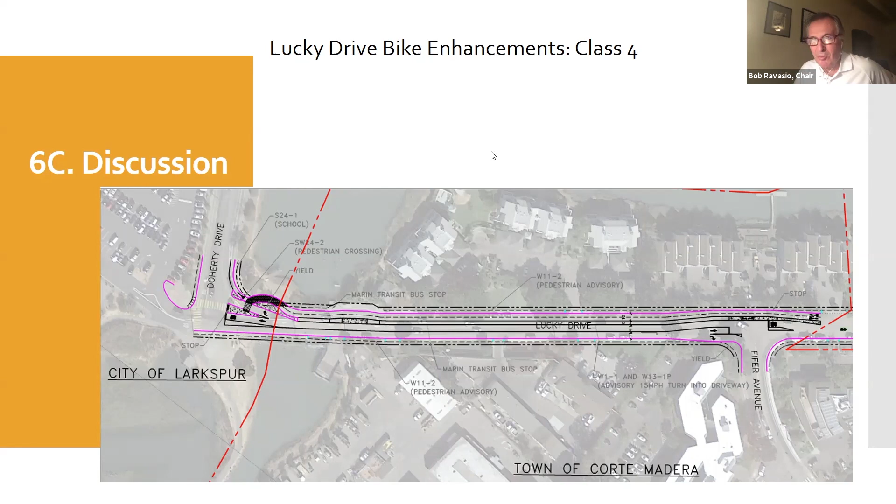Okay, thank you. And let's move on then to the next agenda item, which is 7C, Sidewalk Program Update. I think we are back to Jared and RJ. Yeah, so we're taking a sidewalk pilot program to council next Tuesday, and we weren't planning to do a full refresh of items we've already discussed, but we did want to summarize some of the key strategies, as we're calling them, and also touch on one more significant change to what we're going to be presenting.

So I think last time we discussed a possible $250,000 annual pilot program. That is the case of what we're proposing on Tuesday. In the first year, meaning this current fiscal year, because by the time this gets up and running, almost half of that fiscal year will be gone, one of the strategies we're going to defer, and so the first year we'll be asking for about $150,000.

But since our last meeting, we did sit down in depth with San Rafael and learned quite a bit about what they say is working and what is a very staff-intensive process, and we think we were able to come up with some improvements to that. Also, we'll be presenting this to council moving forward. So next slide, please.

So real quickly, on the top, the bulk of this program involves matching funds, and there's a couple categories. So one is, how much would the town potentially match for sidewalk improvements? The other is, what would they match on trees? And then also on curb and gutter. Those are kind of the three main items. And so we wanted to show the San Rafael process and then how we differ.

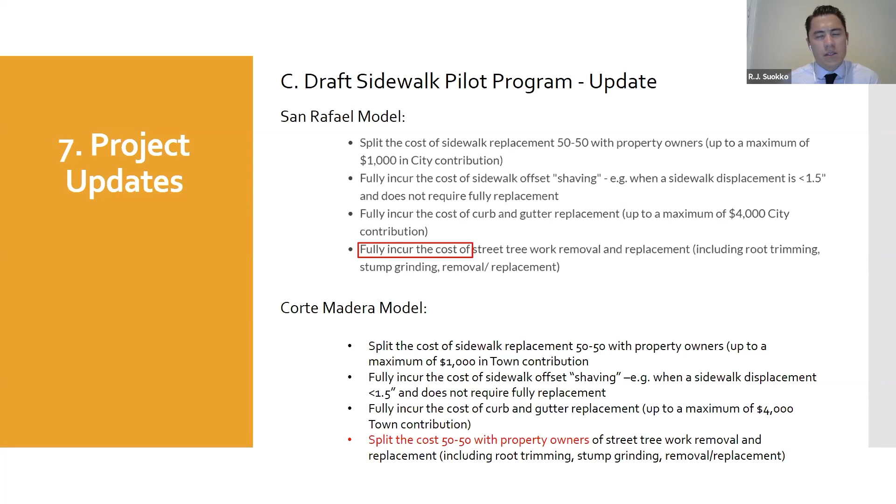So I mentioned there's 4 strategies. And so one is what we're calling sidewalk grinding, or some call it shaving. And the idea is we've done some inspections. We did one through Chapman Park, and we did one on some areas that were prioritized in our barrier removal and implementation plan done in 2013. And what it came back and said was there were significant areas that could be shaved down and or replaced.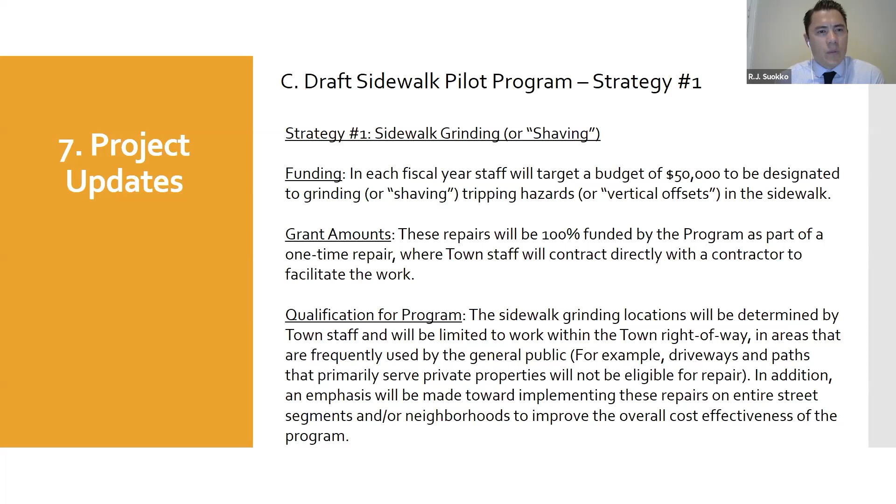And so we think for a contribution of about $50,000 per year, we can make significant headway on those more minor offsets. And when I say minor, we're talking sidewalk panels that are less than 1.5 inch offset, and it's much less expensive than removing it and pouring it back with concrete. Next slide. And so that effort would be a town-led and managed process.

Strategy 2 is something that in a lot of ways we've been doing. For instance, Tamal Vista Complete Streets, there was a good amount of sidewalk work done that was funded by the town. But we wanted to clean up and clarify that role with respect to the town ordinance, which puts that cost and maintenance responsibility on the fronting property owner. So this sets aside money to fund those sidewalk improvements as part of our CIP projects.

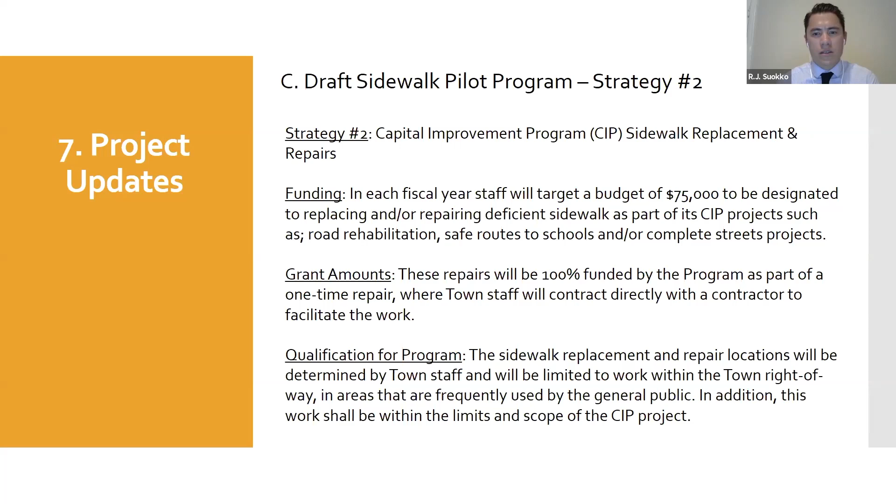Next slide. So 3 and 4 are somewhat similar. The difference being one is an individual process as an individual property owner, and the other is more of a neighborhood or what we are calling zones. So if you were a property owner and you had deficient sidewalk in front of your house because a tree's uplifting it, and you were compelled to repair it, there would be a process where you'd submit an application and would receive some matching funds through a reimbursement.

So you would still go through the permitting process, the application process. You would obtain quotes and hire your own contractor, but at the end, there would be a matching contribution. And so there's some funding we propose to set aside for that. This is similar to what we've taken as an approach on the district side when we're dealing with private sewer laterals.

So it's very similar in how we approach that. Next slide, number 4. So I know this one's a lot to read, and I'll try to summarize it as simply as I can. A lot of those same matching contributions carry through. So again, a 50% sidewalk match with a cap, curb and gutter where it's absolutely needed, funded by the town, and then separately a possible 50-50 tree matching component there, except we would do it from a zone or neighborhood perspective.

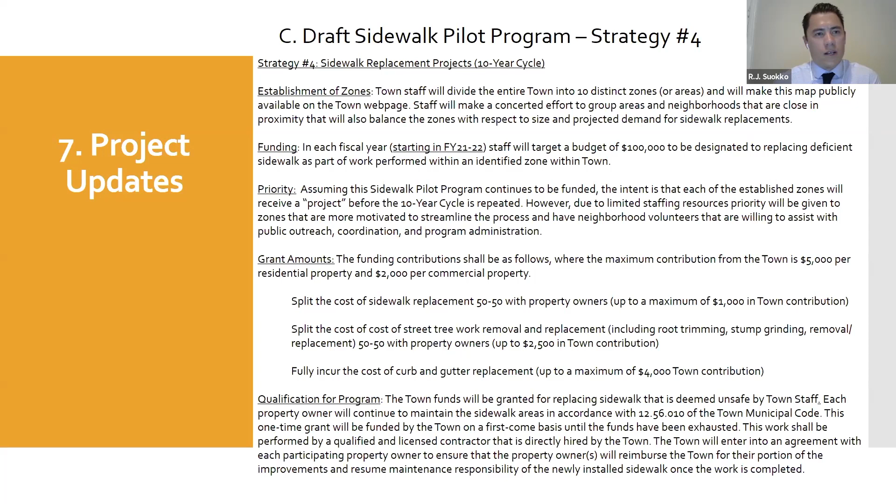So all of the same matching levels mirror the independent process. The difference is the benefit here is more competitive pricing because of the group bid dynamic. And then also the town staff would take a larger role in leading this effort and would actually facilitate it, obtain bids, oversee the work, and then enter into an agreement with individual property owners to later receive their matching portion back. So this is the major deviation from prior discussions that we want to share with you and see if you're supportive. And that concludes the major changes to the sidewalk program.

Okay, thank you, RJ. Any questions from BPAC members on this? I was a little bit confused where it says 50-50 split up to a maximum of $1,000, but then it also said under grant amounts, the town will reimburse the property owners with a maximum contribution of $5,000. So can you clear up that confusion?

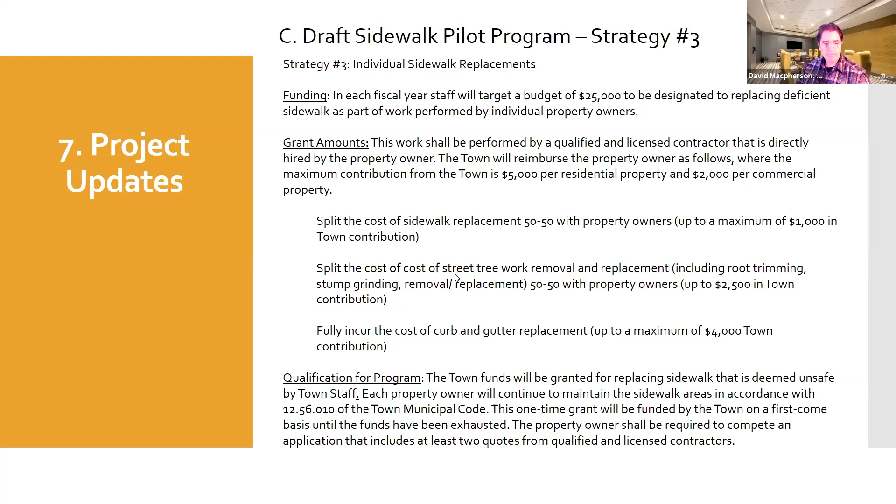And this language here, this text is, I think, verbatim from the resolution. So it should match. It just strikes me that this is a project that we should also get on Nextdoor, the town's reader board, whatever we can do to encourage as many people to be aware that it's being considered by the town council, because it affects 75% of the homeowners in town. Thank you, David. Any other BPAC member who wishes to comment on this item?

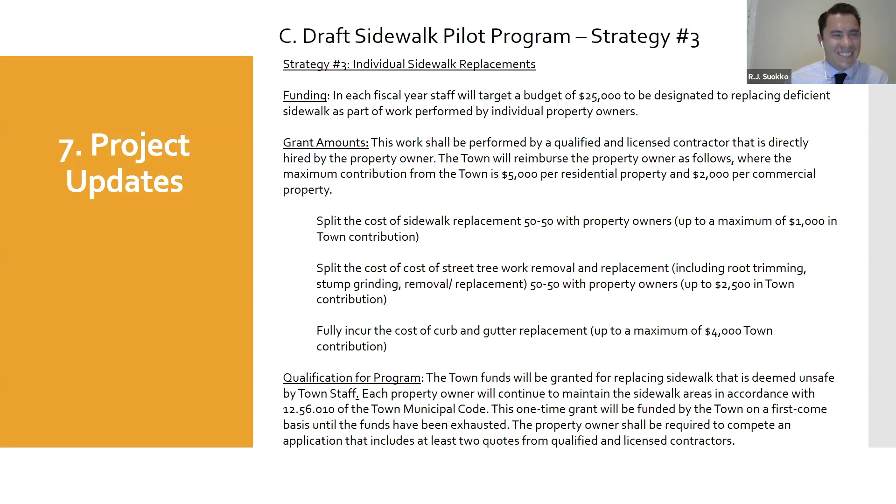Okay, not hearing any further comment, then pulling up my agenda. I think that takes us through all of our agenda items. So we will not have... I think we have one more, Bob. We have one more. Did I miss something? Completed projects. Oh, recently completed. I'm sorry, we're going back to 7B. Okay, thank you. We'll talk about that, I'm sure. Don't want to glaze over that one. Yeah, no, let's take our time on that, right? Yeah, but I will be observant to everybody's time.

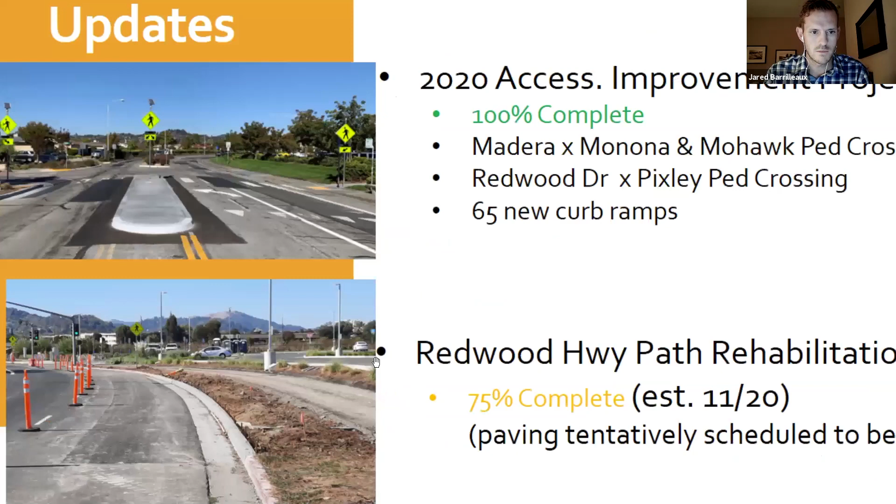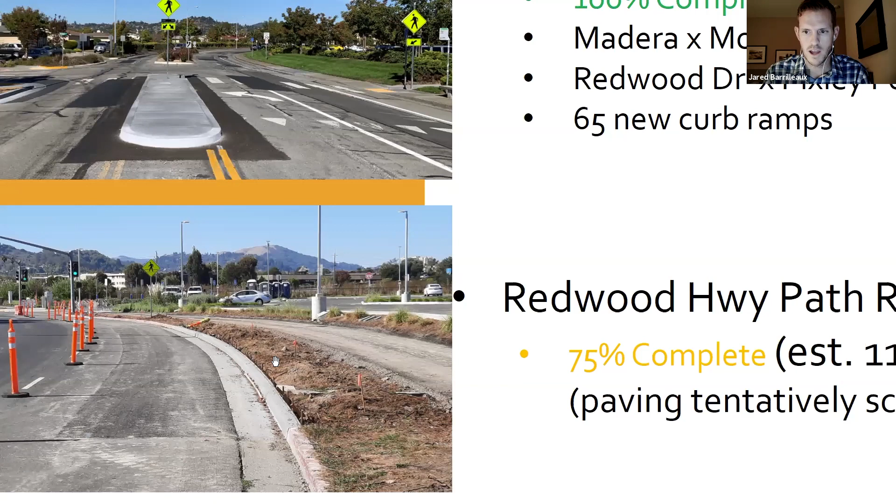And then Redwood Highway Path, that one's an ongoing construction. We're getting close, and you can see in the bottom right some of the recent improvements out there. The dig outs from the tree roots that used to line this street, the new pavement dig out, new curb and gutter, new trees are going to be going back in, and what you see over there is the underlayment, the sub for the new path that's coming in. And I think RJ might be able to touch a little bit more on the path and its estimated completion.

Yeah, so the latest schedule shows them paving actually next week. So although it won't be a completed project by end of next week, there could be users on the path possibly late next week or the weekend. So definitely exciting to get that final course down, but obviously there'll be some significant landscape improvements that'll come in after, and some other minor items to complete, but definitely making good progress. So happy with it. So yeah, that's our ped projects. There's other projects I'm sure you're aware of, but that's our update for BPAC completed projects.

That's all you've been doing? Okay. All you finished. Okay.

Well then that does cover almost all the agenda items. Our final one is future agenda items. Do any of the members of the BPAC have items they'd like to see on the future agenda we should be considering? Yes. So I'd like to have the Echo to San Clemente path grading suggestion by David Bell be placed on the agenda so that in the next 2 months, they can take a look at the feasibility, any ownership issues, cost issues, and the public can weigh in on that.

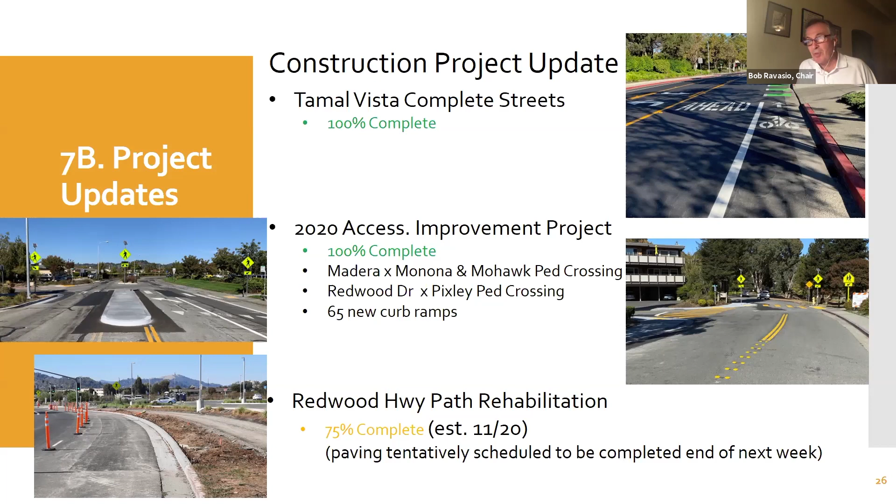How does the fourth week look for everybody? Like the fourth Thursday of the month? What's best for you, Bob? I think that would be good for me because most of my council meetings and other meetings are in the first, second, and third weeks. I'm on about half a dozen different committees for police, fire, and town business, and the fourth week is fairly empty for some reason, so that's a time I usually have free most months.

Cheryl: the fourth week will probably work except for December, because of Christmas and New Year's. And actually this year the fourth Thursday is Thanksgiving, but that varies, and we won't be meeting in November anyway. So if we started this schedule in January, because I don't think we can do it in December.

Is there any preference for Wednesday versus Thursday for anybody, or any day of the week? Whatever you like. Okay, let me work with Rebecca and RJ, and I'll see what we can figure out, and maybe we'll shoot an email out to everybody before the next meeting to settle on a date. But thank you for accommodating that, I really appreciate it.